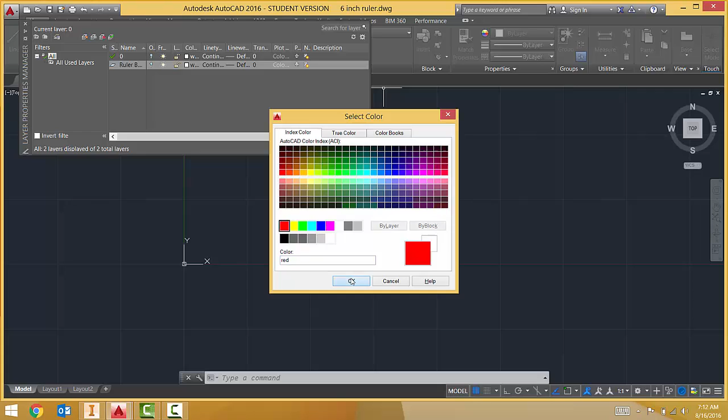My second layer, I'm going to call my increment layer, if I could spell it, and I'm going to make it blue. Blue is to engrave on our laser cutter. And my third layer, I'm going to have a text layer, and I'm just going to make it white. Text layer, and it's already white.

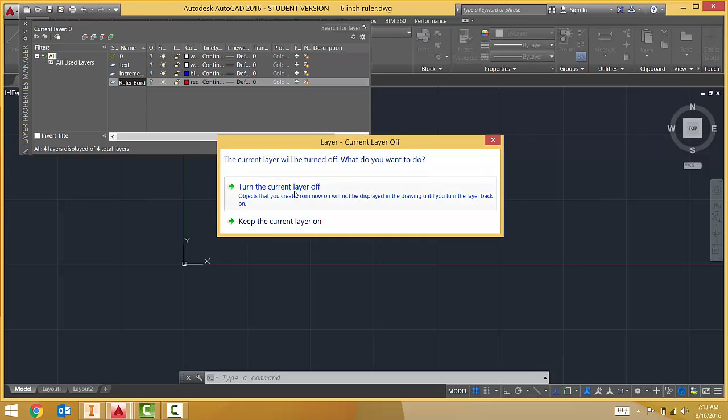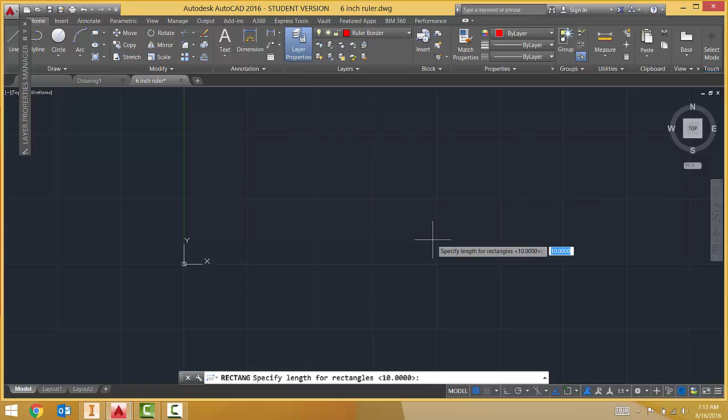Alright, I'm going to start and activate my red border layer by using REC for rectangle. First point is 0, 0. And then if I click down here where it says dimensions, I'm going to have the length of my rectangle 6 inches and the height of my rectangle 1 inch. And then I'm going to click up here so my rectangle is oriented in this fashion.

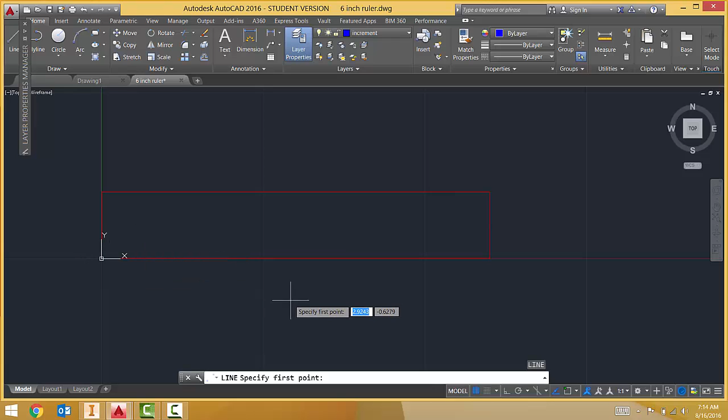I'm then going to go ahead and turn on my increment layer and keep current layer on. The first thing I'm going to do is draw my 1 inch tick mark. So I'm going to do L for line. I'm going to come down here and draw one line up here, and I want my 1 inch tick mark, remember that's going to be my tallest tick mark, to be 5/8 of an inch.

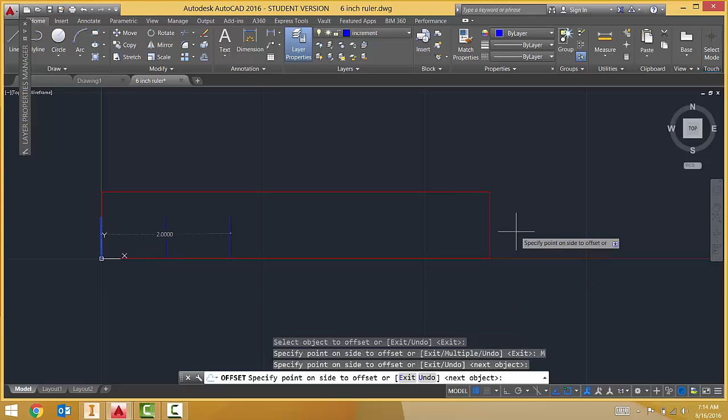I'm then going to offset this tick mark 1 inch. I'm going to select the line, and then so I don't have to keep hitting the offset command, I'm going to click down here where it says multiple and then just keep clicking until it goes all the way to the end, like so. I got a little mistake here, don't I? Because I don't want a line on top of a line, I'm going to go ahead and delete my blue line that I drew.

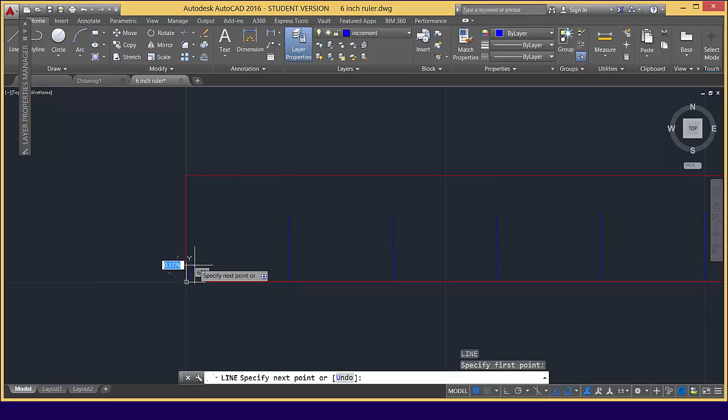Next I'm going to draw my 1/2 inch line. My 1/2 inch line, I'm going to want to go up a 1/2 inch. Again, I'm going to offset it a 1/2 inch. I'm going to select my line, and then again I'm going to come down here and click multiple, and I'm going to keep clicking until it gets all the way to the end.

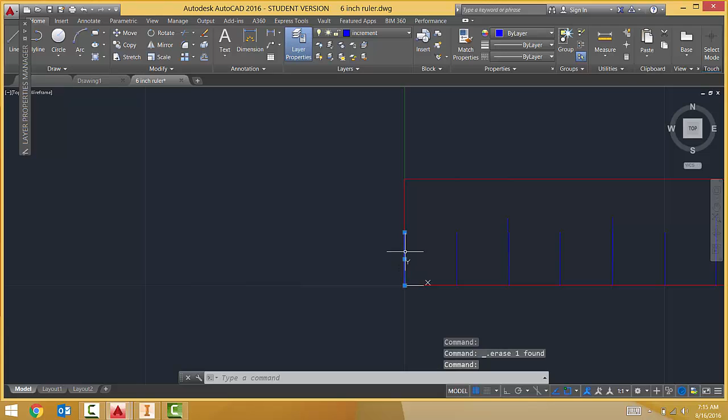I am going to delete my line on top of a line, and I have to do the same thing on top of all my 1 inch tick marks as well, because I don't want it to engrave those twice. If it engraves it twice, sometimes you can get undesired results because it'll burn the wood. I'm going to continue to do this.

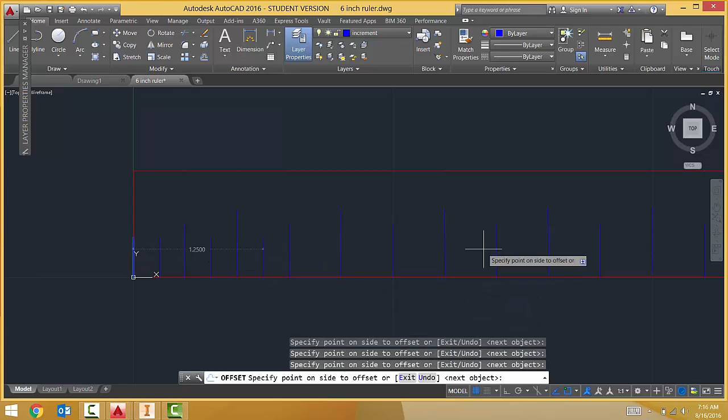My next one is my 1/4 inch tick mark. And then I'm going to go straight up. My 1/4 inch tick mark, I want 3/8 of an inch tall. O for offset. Distance is 0.25. Select my line. Select multiple. And continue to click until you get all the way to the end.

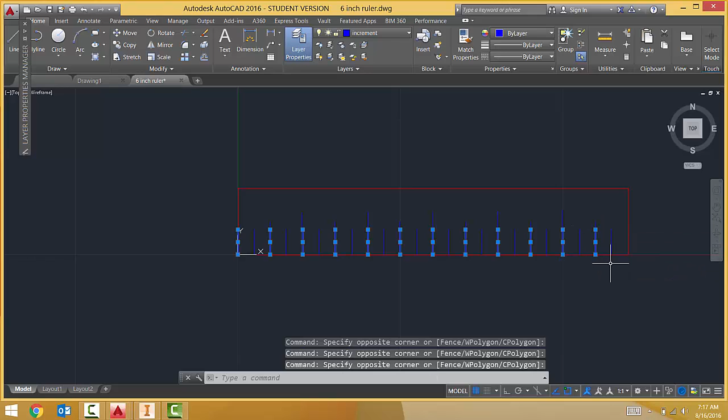Again, I now have to come in and delete where I have that tick mark, where it's been doubled up. This is a little tedious, but it's really not that bad. And delete. That was a 1/4 inch, so I need my 1/8 inch line. I want the height of my 1/8 inch line to be a 1/4 inch, so up 0.25.

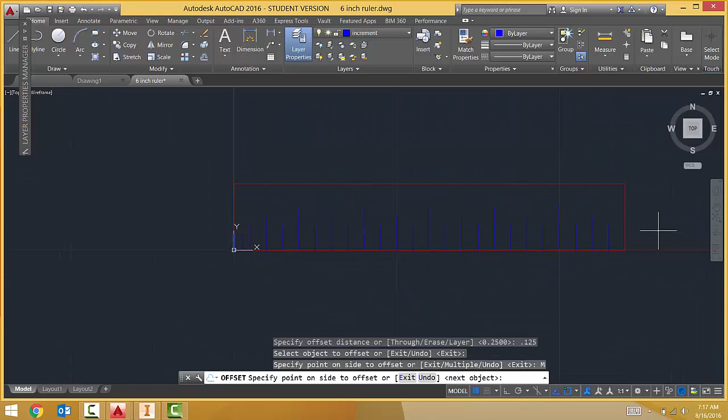I'm going to offset, and the distance, of course, is 1/8 of an inch, 0.125. Specify object right here, I'm going to click multiple, and I'm going to come out here and just continue to click. Again, going in and deleting.

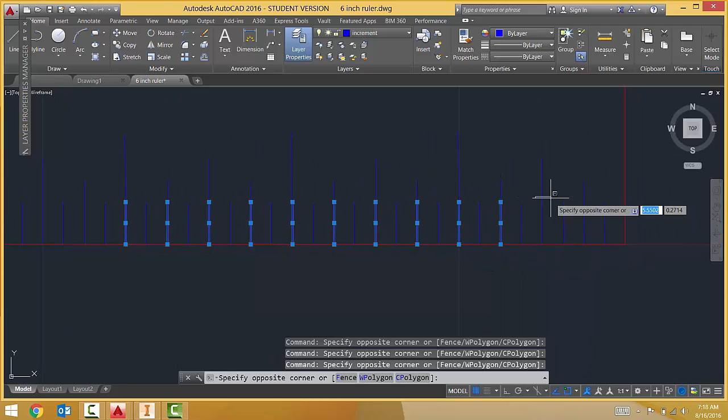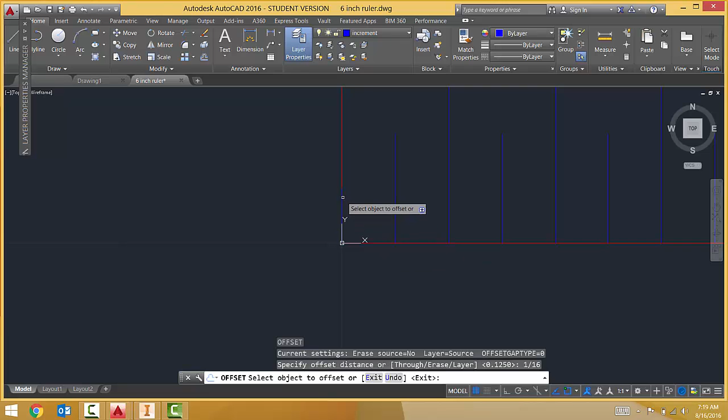My last increment is going to be my 1/16 of an inch increment. And the vertical height of that line is going to be 1/8 of an inch, 0.125. Again, that should be my smallest line. I'm going to offset that 1/16 of an inch, 1 divided by 16. Select my line, select multiple, and this is going to take a lot of clicks.

Alright, so I think what I'm going to do this time is just highlight everything. If I hold down the shift key, I should be able to unselect. I'm holding down the shift key the entire time I'm unselecting. I don't know if this is faster or not, it's just a different way of doing it. So you can see multiple ways.

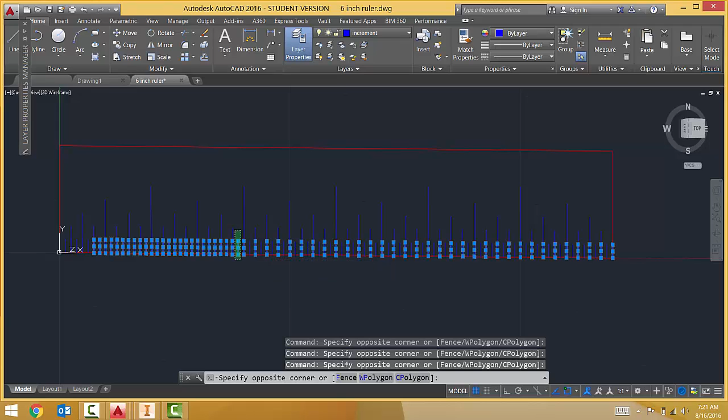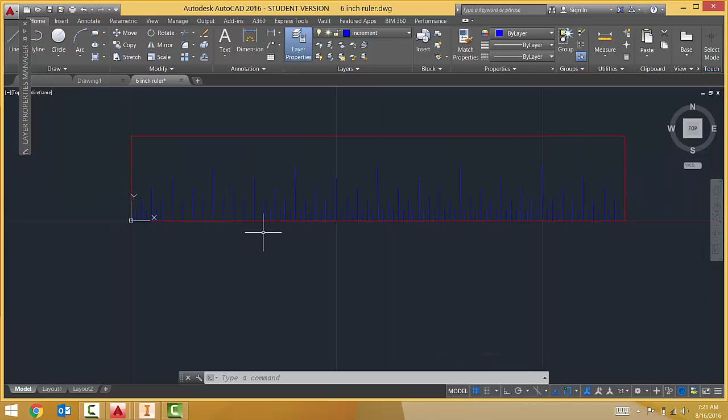I'm going to go ahead and hit delete before I lose all that stuff. Huh. Undo that. Okay. So now that I've deleted all of my lines, I'm then going to add my text. I'm going to type in the word text. Actually, I'm going to activate my text layer.

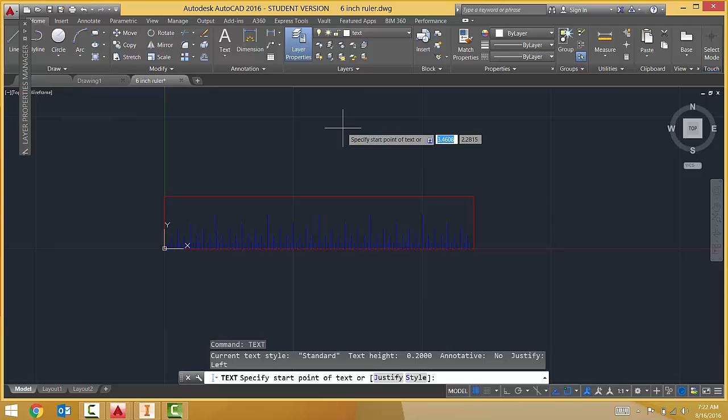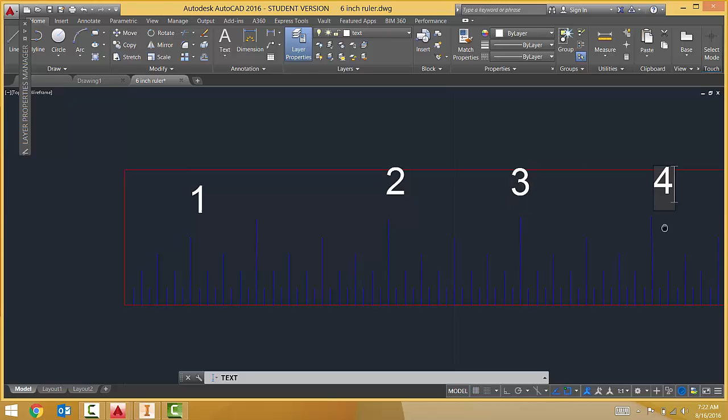I'm going to start my text, specify start point. I'm just going to click right here. Let's see what the default setting looks like. We can go ahead and use that. 2, 3, 4, 5. I'm going to move them a little closer into place.

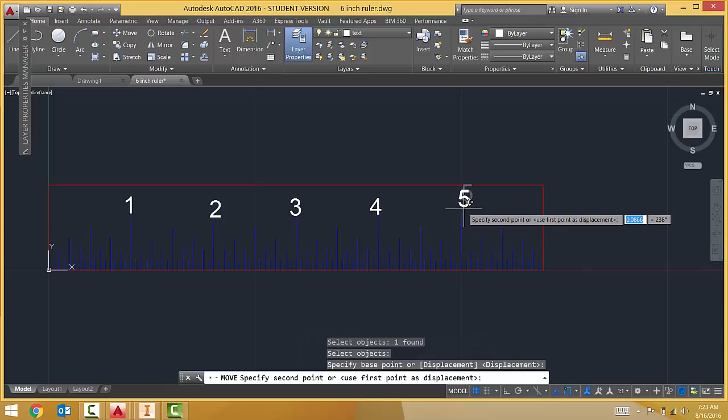So that's 1, there's 2, there's 3, there's 4, there's 5. And lastly, very important, you have to make sure you put your name on your ruler so they all don't look the same.

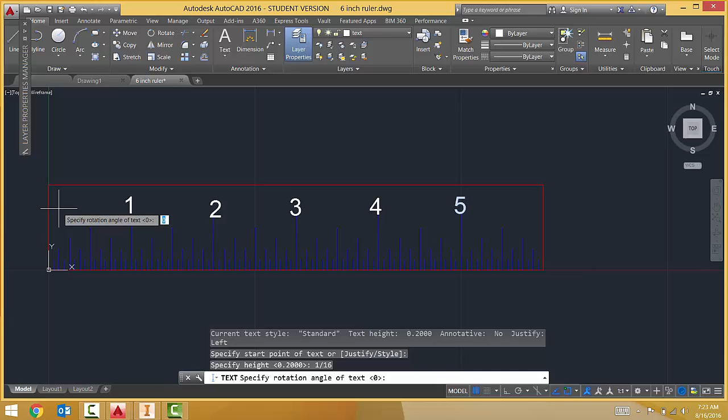I'm going to put my name right over here, but instead of 0.2 as my text height, I'm going to make it, how about a 1/16 of an inch? So 1 divided by 16. And I'm just going to type in Colin Denny.

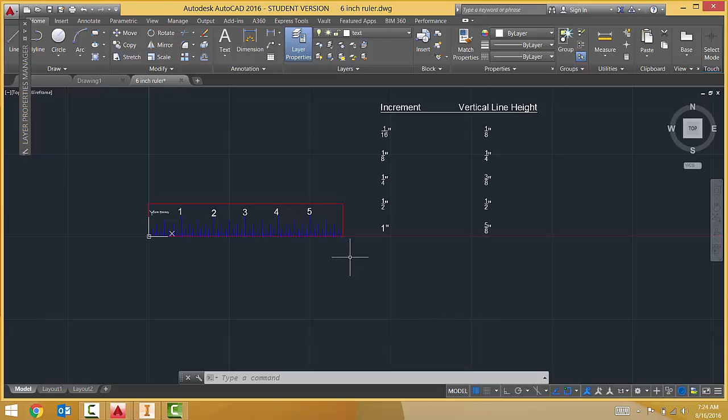Just so you guys are aware, the actual line heights of everything that I would like, the vertical line height of each increment, I have right here. Don't forget to put your name on your ruler. Once you have this, make sure you save it to your H drive so we can then take it over to the laser cutter. If you have any questions, please come see me.